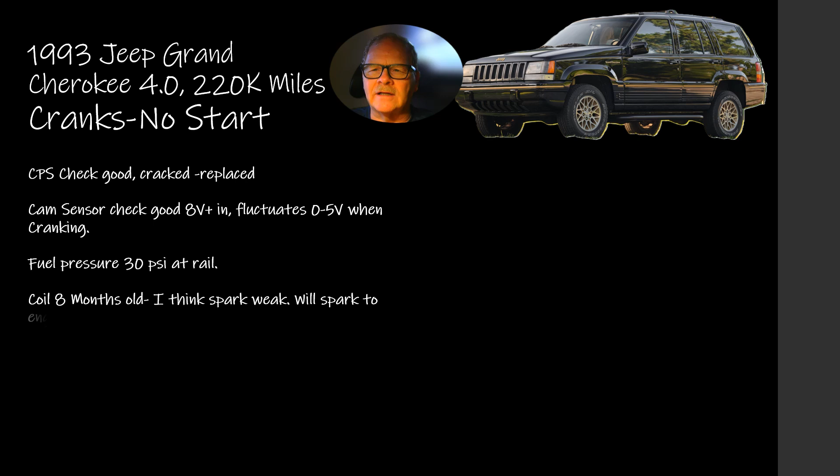These things, and I'm going to give you a pretty good bit of detail on each one of these. This Grand Cherokee, 4-liter, 220,000 miles, cranks no start. So this is him giving me, the guy told me everything he had done.

He actually worked pretty hard trying to find this himself before he came asking for help. He checked the reference voltage going into these sensors, the speed sensor, cam sensor, crank sensor, and the vehicle speed sensor is an 8-volt reference voltage on these Chrysler products, but he said 8-volt plus. Fuel pressure, he measured that. Coil, he says, well, may have a weak spark. Disconnected battery cable, comb. The ohm checked the coil good at home, and it checked good at AutoZone.

And they replace the cap, rotor, and plug wire set. A lot of times people like to do what they know how to do. In other words, they'll change the parts they know how to change, hoping that will fix the problem they're looking for. Now you put a coil back in it, checked input, 12 volts, make sure he's getting enough.

He was basically doing some comprehensive testing here. Put a new coil wire on it, no start, sparks to engine, not to the plug or the cap tower. Now think about that for a minute. It was sparked to the engine, but not to the plug, because it's having to go through the wires and jump across the gap on the plug.

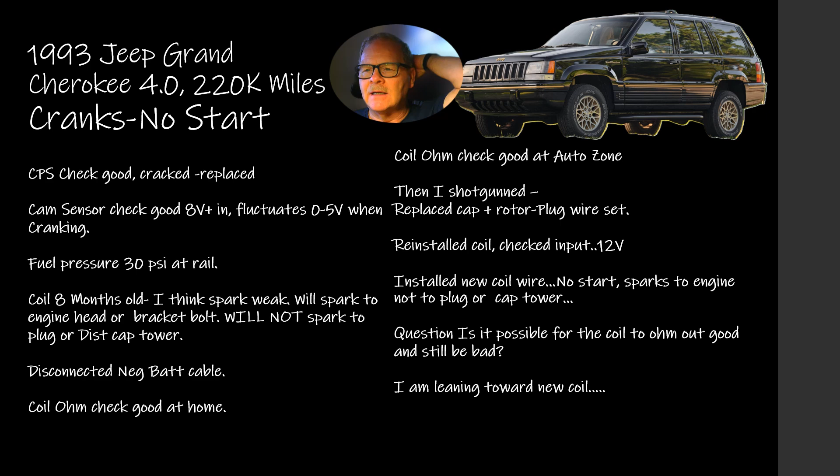So he said, and that's in compression, right? In other words, whenever the cylinder's under compression, it's harder for that spark to jump. Is it possible for the coil to ohm out good and still be bad? So they're leaning toward a new coil.

What I said was, good voltage going in, replace the coil. I like to stretch that spark until it's about an inch and looks scary as all get out. Bop, bop, bop, bop, bop. And if I see a real weak spark that goes away when I stretch it after about a 3/8 or a half an inch, I've seen hard starting problems because of a coil that was a little bit weak too.

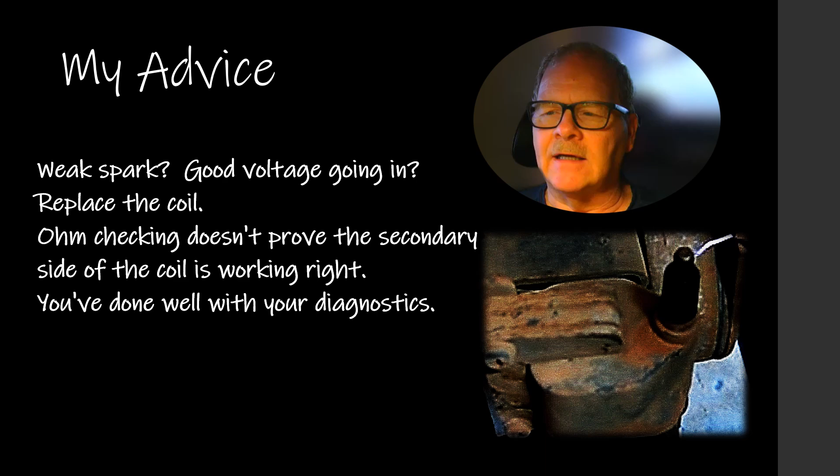But anyway, he'd done good diagnostics and all, and his follow-up was a new coil, so much better, rounds out the book info. So basically the book used to say if the spark would jump a 1/4 of an inch, that was good enough. That's just not the way it is, and I don't think it ever has been.

I've seen some really good mechanics get smacked around because they saw that 1/4 inch spark jump and thought everything was okay when it wasn't. They'd see that 1/4 inch spark jump, then they'd go off in another direction whenever they should have made it stretch a little farther.

I had a student that did that when I put him over there at one of the dealerships. He's working at a Nissan dealership, and they had him working on a Cadillac. He called me and said that he pulled it into his stall to do an oil change. It wouldn't start afterwards, and he checked for spark. I said, what did it look like? He told me it was orange, and it was only about... and I said, well, yeah, I've told you about that in class. Put a coil on it, and he did, and it fired up.

This one here is running hot. It's a 90 model GMC pickup.

A lot of people love to have one of these old tanks here. Love these trucks. I take a picture of one whenever I see it. You might have seen some.

Well, the engine was well maintained, burns a little oil, always starts. Thermostat replaced, the vehicle still runs in the high temperature range, runs around 210 when the outside temperature is 75 degrees, but around 220 when it's 80 degrees or higher. Now that's not terribly hot, but when he's going 75 to 80 miles an hour with a lot of air coming through the radiator, it goes above 235, and he turns the air conditioner off, which stops that hot refrigerant from going through the condenser. That cools it off a little bit.

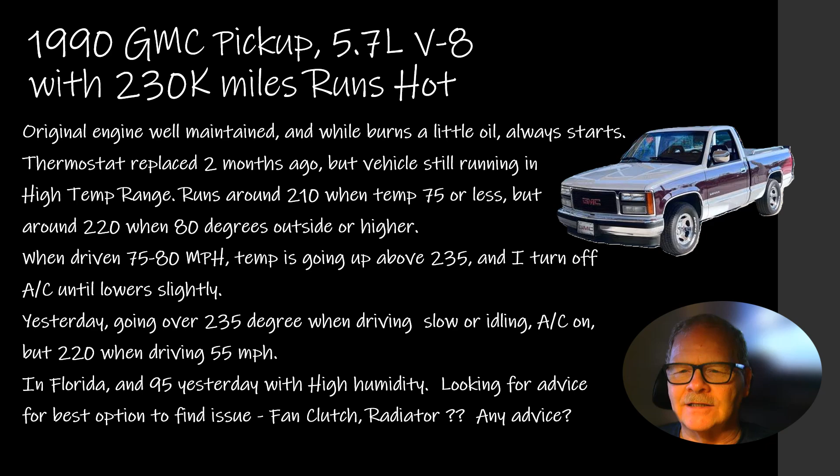So he said in Florida it was 95 yesterday with high humidity. So I told him, I start by having the radiator removed and cleaned, inside and out. I've actually cleaned radiators on the outside, just took them and gently hit them with a pressure washer and washed all the crud out from between the flues, and made one cool down like that.

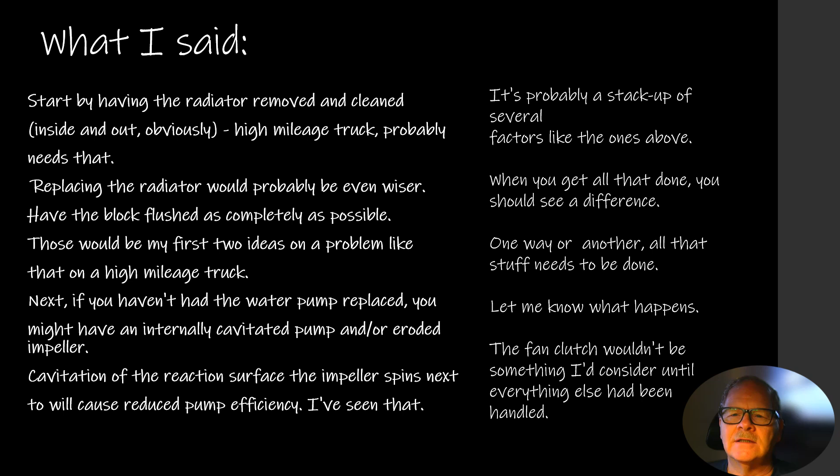Replacing the radiator would probably be wiser, have the block flushed. Two ideas. So if you hadn't had the water pump replaced, you might have an internally cavitated pump or eroded impeller, I told him. Cavitation of the reaction surface of the impeller will cause a reduced pump. Probably a stack up of several factors. I've seen that kind of thing where everything's contributing a little bit to the problem. When you get that done, you should see a difference.

All that stuff needs to be done anyway on a truck this old with this many miles on it. I've often said that, particularly on these vehicles with plastic radiators, we probably ought to start replacing the radiators at like 125,000 miles. It wouldn't be a bad idea to replace a radiator, just because if those plastic tanks split, it's an engine ending deal there.

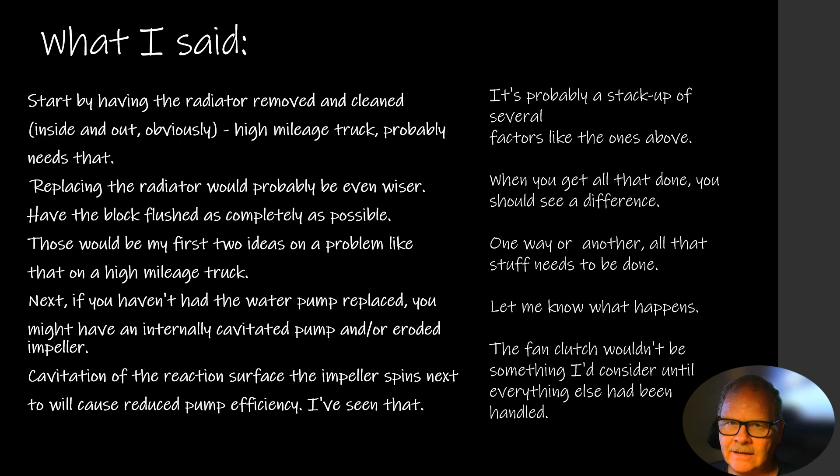Well, his follow-up, and he sent this picture, he decided to replace the radiator, and that solved the problem. Stays under 200 no matter what the driving condition. Now that's a little bit too cool. He probably put a cooler thermostat in it than he should have. When we cut the old radiator open, that's what it looked like there. And he sent me a picture of his new radiator in there. Thanks for the advice.

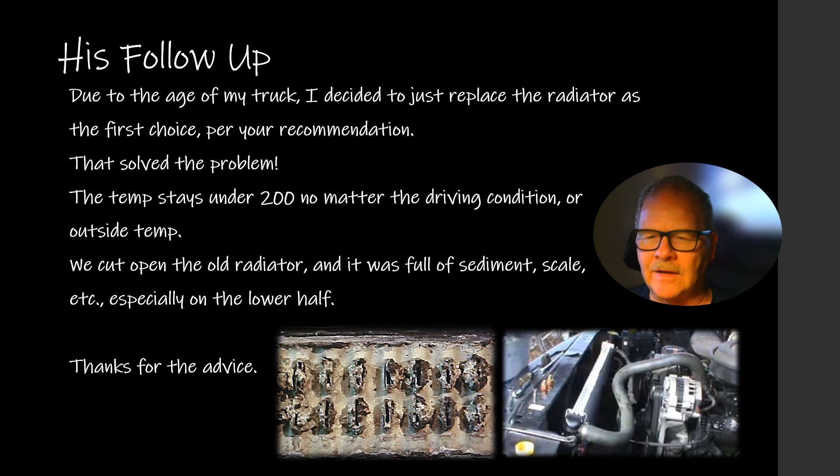That's a Dodge Neon. It had an input-output speed sensor that was bad. So she got a diagnostic test at an AAMCO transmission place, and they gave her a printout and said that was the problem. She didn't want to pay them $300 to fix it, and I figured if they could do it, maybe get some of my friends to fix it.

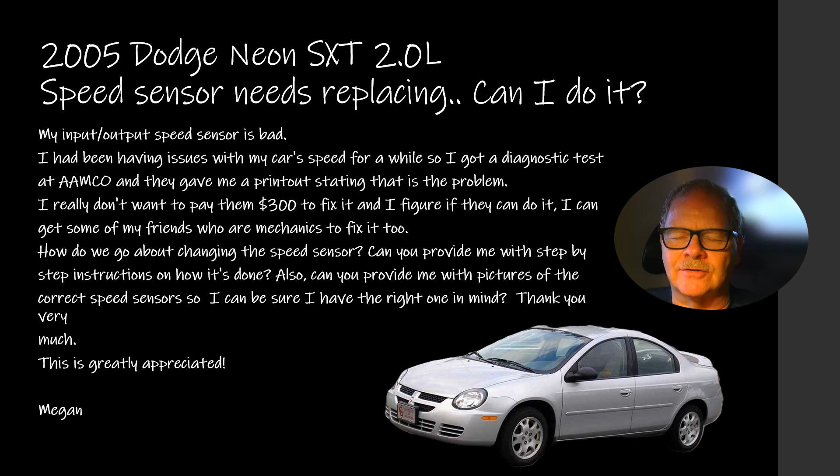So she wanted to know how to change the speed sensor, wanted instructions on how to do it. Well, these things are downright easy, because they're just plastic things, and they're right down here on the side. I actually sent her this picture and that picture right there, and her fiance and her did it over the weekend in about 30 minutes, and the shop was going to charge her $300. I'm all about helping somebody if they can do something fairly easily themselves.

Now, there's some things that do-it-yourself people don't need to fool with, unless they're really good do-it-yourselfers. Sometimes I won't even give anybody any instructions if they're wanting to do something that's going to be dangerous or might get them hurt, because the last thing I want to do is give somebody some kind of advice that causes them some sort of pain or loss.

She said they got the inspection passed today. I don't know how that speed sensor must have been throwing a code or something that was keeping her from getting her emissions inspection passed. She didn't elaborate on that.

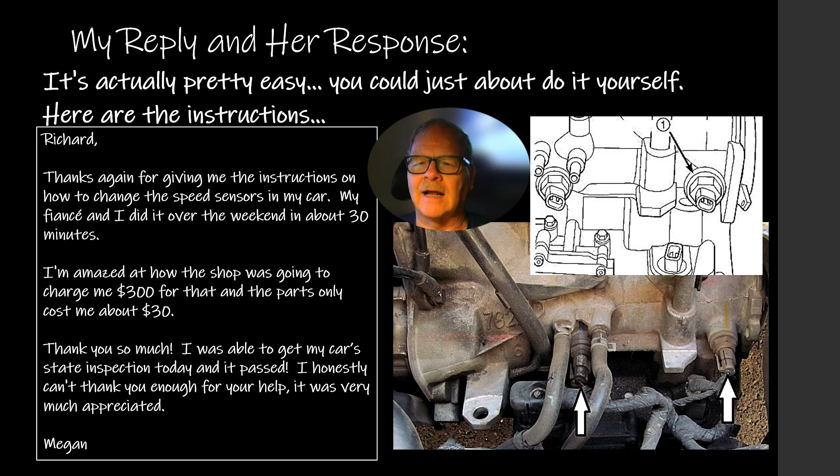Here's another 93 Grand Cherokee. Front passenger side studs for the lugs keep breaking. He's replaced the rim studs, the lugs, and rotor. It broke again. What should be causing this? He just kept having one problem after another.

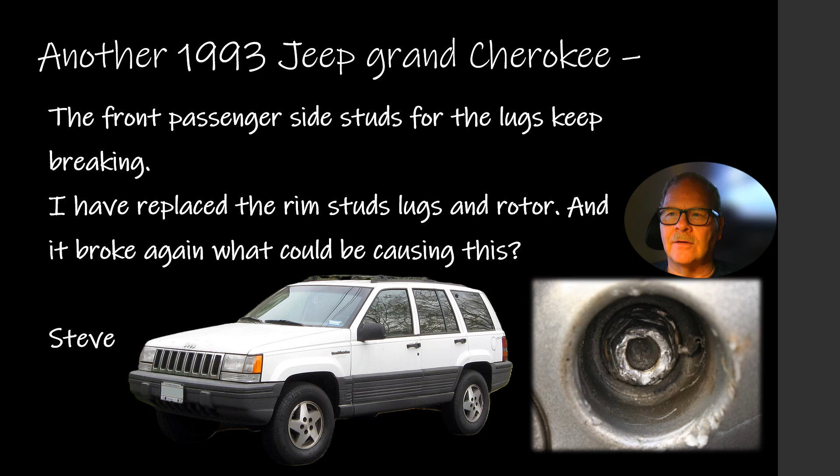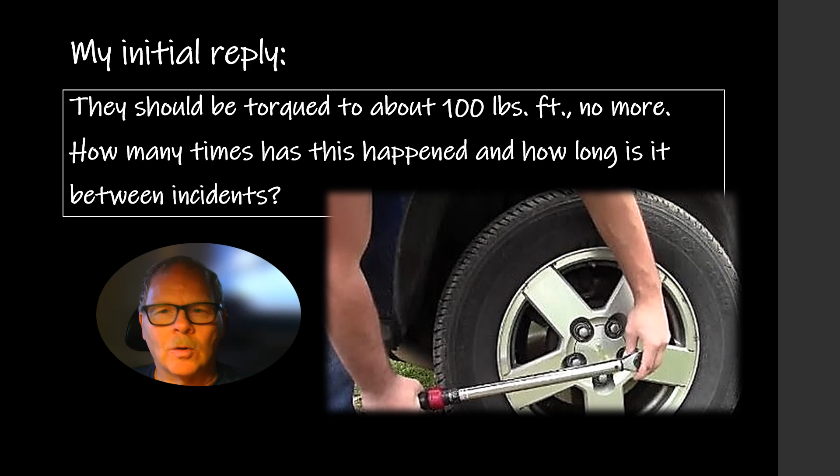I knew a guy that got a brand new 71 Chevelle way back when, and he put some fancy chrome wheels on it. The wheels kept coming off of it going down the road. What he didn't realize was, and I told him, they should be torqued to about 100 foot-pounds, no more. How many times does this happen, and how long between incidents?

He says he got it a month ago. About a week after, was the first time they broke. Took it to a shop, had it fixed. Somebody probably got rid of the thing because it was giving him this trouble. About 2 weeks after that, he checked them, and they were loose, all the lugs.

So he took a four-way and tightened them down again. Drove 30 miles, checking them every now and then. Last night, when he got ready to head home, he had 2 lugs and 2 studs left. That's bad. It's wallering the holes out in the rims and all that. And he wanted to know what to do.

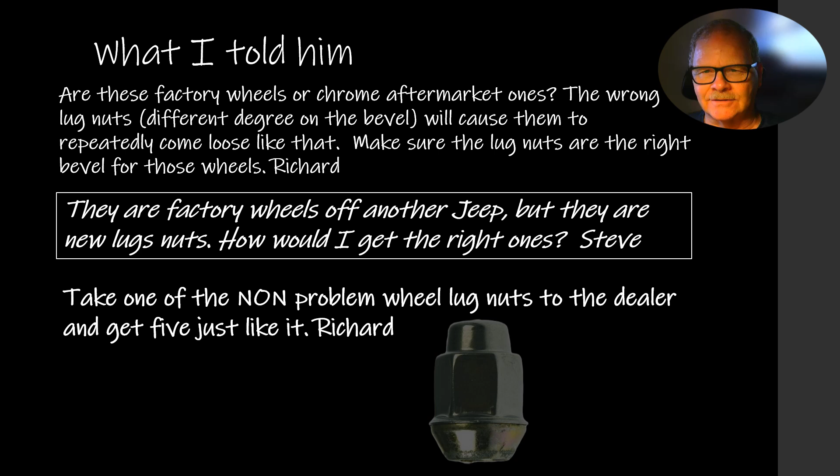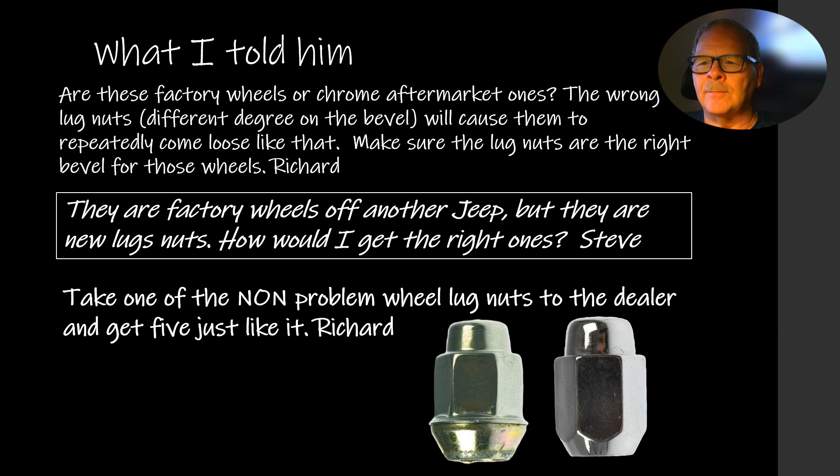I said, are they factory wheels or chrome aftermarket wheels? The wrong lug nuts, different degree on the bevel, whatever, will cause them to repeatedly come loose like that. Make sure the lug nuts match. That's what was going on with that guy's car, that 71 Chevelle. He was using the original lug nuts to hold these aftermarket wheels, and the bevel was wrong. I said, take one of the non-problem wheel lug nuts to the dealer and get 5 just like it. So this is an illustration, and I actually made this better than it used to be. I had another illustration I made similar to this.

Some of them have a ball seat, some have the flange. Stamped steel wheels usually have this 45 degree, and the aluminum wheel will have a 60 degree taper. If you put something with this kind of taper on a wheel like this, or vice versa, or anything else, it's going to come loose. That's just all there is to it.

I have seen some students, when I was teaching, I would say take the wheel off this car, do whatever, and put it back on. They would put the lug nuts back on backwards with the bevel side out. And I was thinking, I don't remember a time in my life when I didn't remember how lug nuts went on. This is ridiculous. I used to take pictures of that every now and then and say, don't do this.

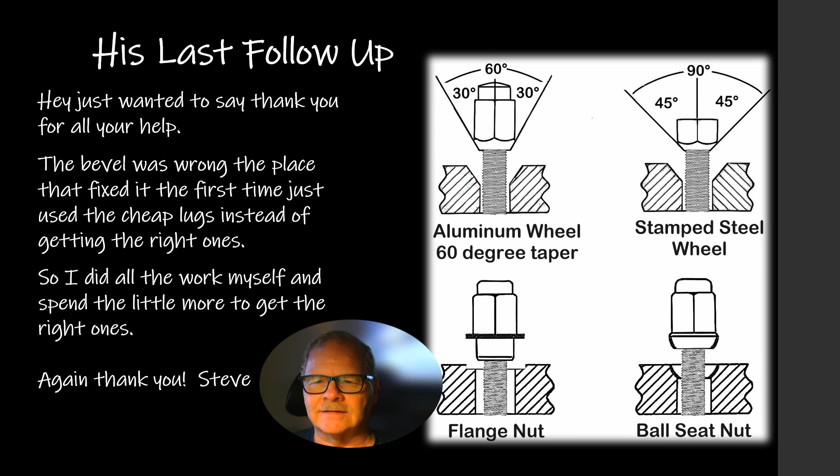This 94 Camaro had a wiper problem. Whenever they turned off the wipers, it would stop in the upright position. You ever see that on a Crown Victoria? It needs a wiper motor. But on this one here, there is a circuit board. So he said, do I need a new wiper motor, blah, blah.

I said, this is a wiper motor problem, try the board. You can buy this board, and it will usually fix those wipers when they're doing crazy stuff like that, or when they're not working at all, or when they're running all the time, or something like that. He didn't understand when I told him try the board first, he said he didn't understand what I meant by that. So basically I was saying you can't check the board, but you can buy one.

The part number at Cardone is 8110112BP, and it costs about $45. That's how much it cost back then. I think they're more than that now, by about $100 now. But it's easy to replace, contains the park contacts and the circuits that drive intermittent wipers. There are several different ways that these things are built, and you can actually buy one from one vendor that's for the same motor, and they look different as far as their circuits, the way they're designed, but they will still work.

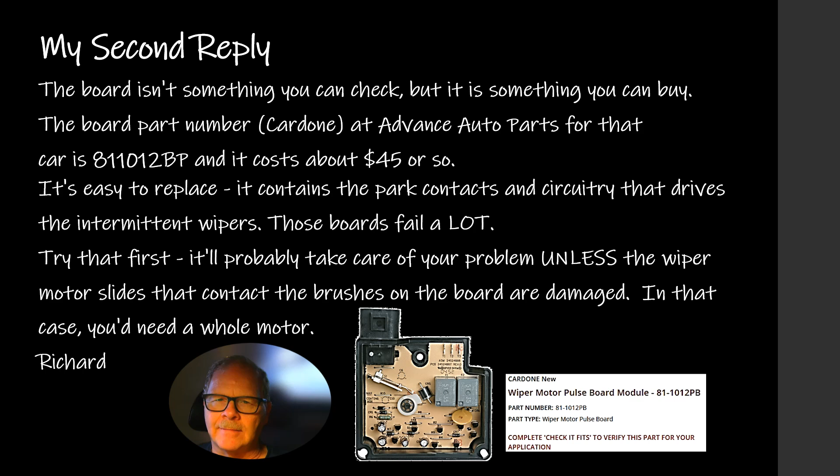But you got to make sure you're getting the right one that they built for that vehicle. Anyway, he took care of that. I suppose I never heard from him again.

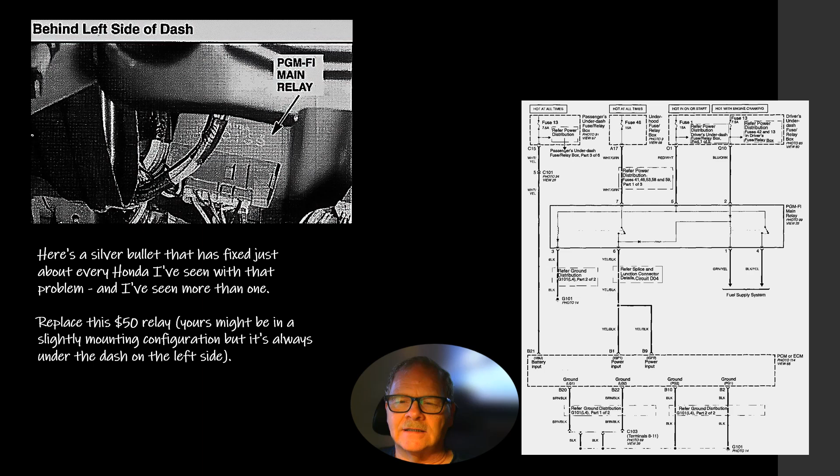This one would be cool. 98 Honda Accord, 6-cylinder, intermittent starting problems. Engine cranks but doesn't start. Happens with no warning, sometimes weeks elapse between failures. Every time after calling AAA and getting the car towed to the mechanic shop, the car starts immediately, and my mechanic cannot diagnose a problem. He's like, I don't see a problem here. And I said, okay, some of you guys probably already know this. This is a silver bullet.

It's fixed just about every Honda I've seen with that problem. This $50 relay that you find under the dash, typically over on the left side, looks like this, and it's got 2 relays built into one, is what it amounts to. It basically operates the fuel pump and turns on the engine controller computer. Either one of these parts of this relay can be bad and can prevent it from starting. Every time I've ever seen a Honda with an intermittent no-start problem, if you swapped out this relay, it would take care of it. Now I'm not saying that's always going to be the case, it might be other problems, but this is a very, very common failure on those Hondas.

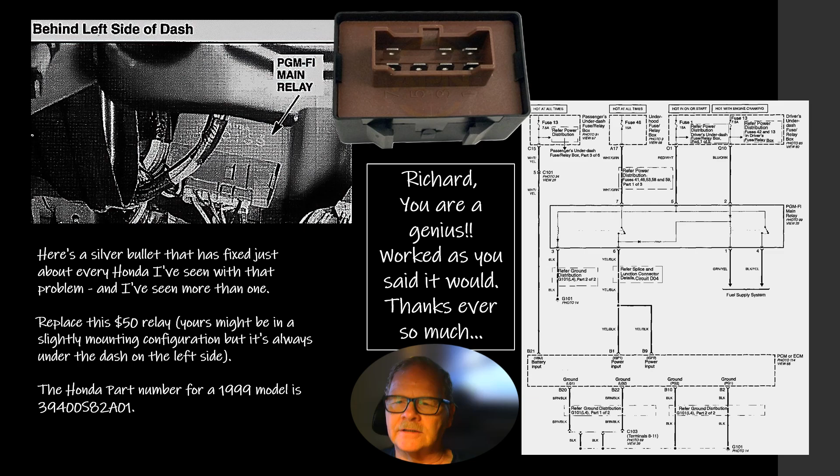95 Toyota Camry, 4-cylinder automatic. When I come to a red light, I put pressure on the brakes, and after hitting the brake I continue to apply pressure to keep the car from moving. Once the car stops, I can feel it and see my foot moving deeper. The brake pedal's falling out from under his foot. When it happens, the car starts to move and it stops immediately within a second or less, and that's pretty cool. It's like this.

I took this video on my Explorer when it had a bad master cylinder. See that pedal just keeps going down? Alright, you can hit it a second time and it does okay. Then when you mash it, it'll just slide, it falls out from under your foot. And so that was, and I told him, I says—

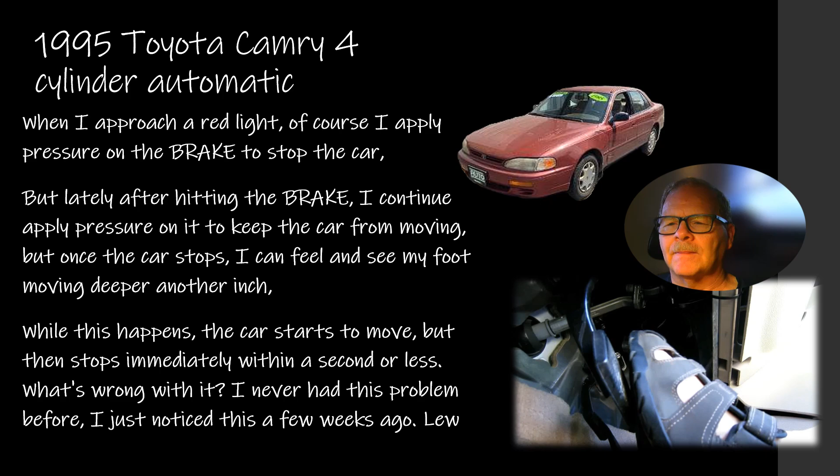You've got a bad master cylinder. Let me know what happens. This guy right here was pretty sharp. He pulled the master cylinder off, tore it apart, looked at the cups in there on the little piston, and found the problem: one of the seals had a little nick out of it. He tried to find the seals only, but they wouldn't sell them that way, so he had to buy a new master cylinder, cost 60 bucks plus tax. I put a master cylinder on a 70 model Ford truck I had one time, and the master cylinder was $14 and the core charge was $18. The core charge was more than the actual part, which I thought was kind of funny.

A 2000 Jeep Grand Cherokee: my electric fan's staying on all the time. Father's a retired mechanic, hooked up a switch for me to manually turn the fan on and off. He's stumped, we think this is an electrical problem. Before I hand it over to an electrical tech, I wanted to ask if you knew what it might be. He changed the heating module, I don't know what that means, and the thermostat, and it wasn't that. We'd appreciate any help you can give us. Heating module - I'm not sure what a heating module is.

Well, this is what I told her: cooling fan relay, solid state, kind of hidden, it could be the problem. I've seen that before on these. So she said, 'Hey, my Jeep's all fixed, thanks for your advice.' That's the thing, that's what this thing looks like. And I pretty well showed her where it was mounted. It's a little bit annoying to get to, but not that bad, you know.

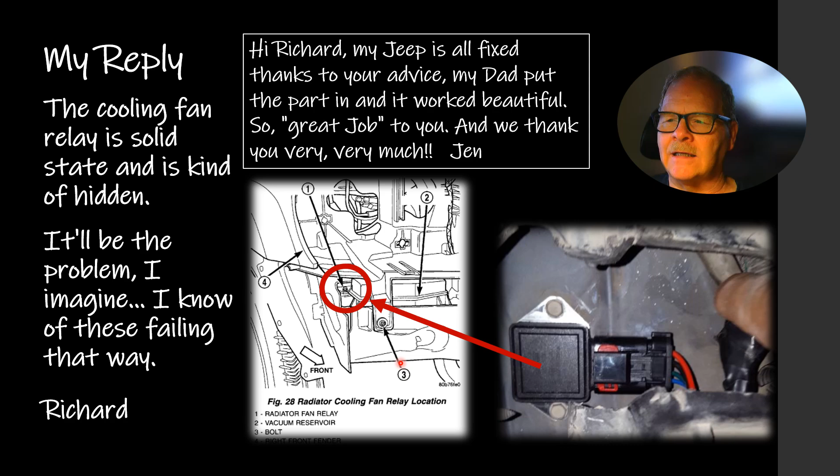95 T-Bird won't start. I had a T-Bird with a 4.6, started stuttering, lost all power. Fuel pump wasn't putting out enough pressure, so he replaced it. Still wouldn't run. Checked the spark, it was sparking. Checked the coils, one wasn't reading anything, but the other reads 12.2 ohms resistance. Went to the junkyard, got another coil that reads 12.2. Read the book, they're supposed to be between 13 and 14 ohms. They're sparking though, they are sparking.

So he ordered a cam sensor because the code popped up for it once before all this. Now the car still won't start. All the plugs are wet, and it smells like gas, really strong when he cranks on it. He put new plugs and wires in, replaced the crank sensor, and the firing order's right. I think it's a spark problem because I tried starting fluid and it didn't change anything.

See, he's really digging into this thing, trying to figure it out.

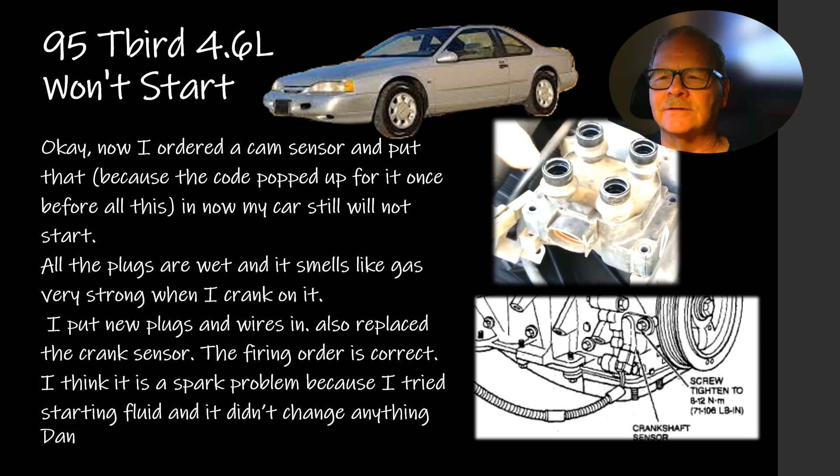And I said, okay, we know you're getting fuel. I'm assuming you checked the pressure with a gauge. We know you got fuel injection because the injectors are clicking, since these plugs are wet. Next, we know you got spark - it should be good and strong, able to jump about an inch. We know you have good spark plugs because you replaced them. All these elements won't fire, which leads us to look deeper in other places besides spark, fuel, and electronics.

My next question is, did it start skipping and quit on the same day, or had you noticed a loss of power for a while, a few weeks or days before it finally died? I said, if the exhaust is totally clogged, it can keep it from starting - that's why I asked how long you've been experiencing symptoms. And I said, if I was in your shoes, I'd be checking compression to see if there was some kind of timing chain issue. Low compression on one or more cylinders would point in this direction.

But he'd already eliminated a lot of stuff.

So this was his follow-up. He said, 'Oh, thank you for helping me solve this problem.' He did a compression test, and the compression was all over the place, even though the engine had been rebuilt. He still might have timing chain issues.

It turned out the catalytic converters were the problem. He unbolted the exhaust pipes, and it fired right up.

So I had seen that before. I told him about that one time - whenever my buddy, I told him to pull 3 of the plugs out of a 6-cylinder, and it fired up sounding like a machine gun.

Incidentally, this is a kind of funny story, and I'm going to close right here at the end. I was going to tell you the older Jeeps had a cam sensor, but it was in the distributor. On the older Jeeps, the old 4 liters from like '87 to '90, you could disconnect that cam sensor and the engine would still have spark and fuel injection and all that. But on the newer ones, if the cam sensor goes dark, it won't work right - it won't start a lot of the time.